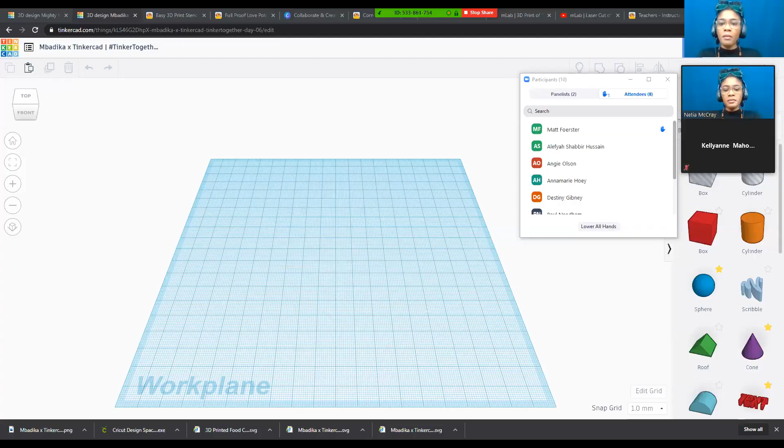So I want to see one more time a show of hands—who has logged into their Tinkercad account so we can get started? If you still need to get cardboard, we'll have another opportunity to grab additional materials for this session. But as I remember from last week and some of your comments in the Q&A, I want to make sure we get started on time. So for the first part, you don't need your cardboard exactly—we can just jump into the actual Tinkercad model.

So raise your hand if you're ready to start, meaning you're already logged into your Tinkercad account. If you don't have a Tinkercad account, go ahead and go to tinkercad.com to create one. I'm going to put it in the chat box so you can copy and paste the link.

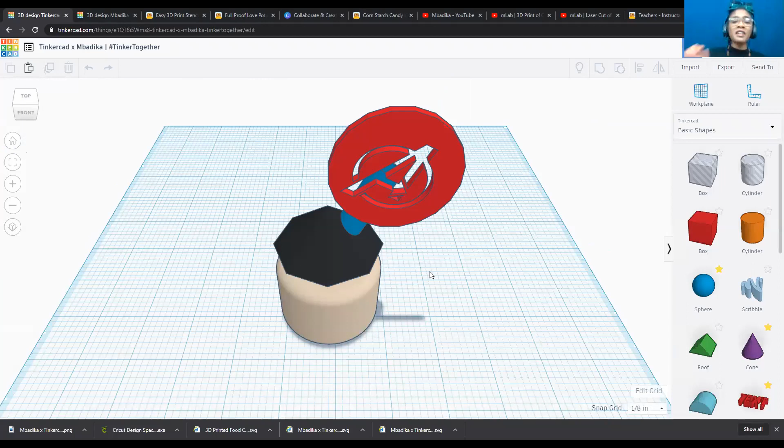Another project someone remembered that we did was a hot chocolate project. But it wasn't just a hot chocolate project — we did something very special with the hot chocolate.

Now, I confess, I've been binging a lot of YouTube videos, and one that's been inspiring me and providing comfort is known as Korean home cafe videos. The whole purpose is for you to create cute beverages, milkshakes, smoothies, coffees, and lattes like you'd see at Starbucks or Teavana or any boutique coffee shop, making it at home with cute cups and cute ice with whole strawberries in it. It's something I find very soothing when I'm stressed out, which has not been a weird coincidence over the past couple of weeks.

So one of the things I wanted us to do was create a stencil inspired by those videos in order to transform our everyday beverages into something really cool. One of the things we actually did was create a stencil in Tinkercad.

With that stencil in Tinkercad, as I'm going to show you right now, we actually 3D printed as well as made a cardboard version of the stencil in order to transform a hot cocoa beverage into something with a little bit more of a personal touch.

So as you can see here, I have my organization's name, spelled Mbadika. I put little stars here, and I put an egg because it was close to Easter, and I felt spring was for a new beginning, so that's why I picked an egg.

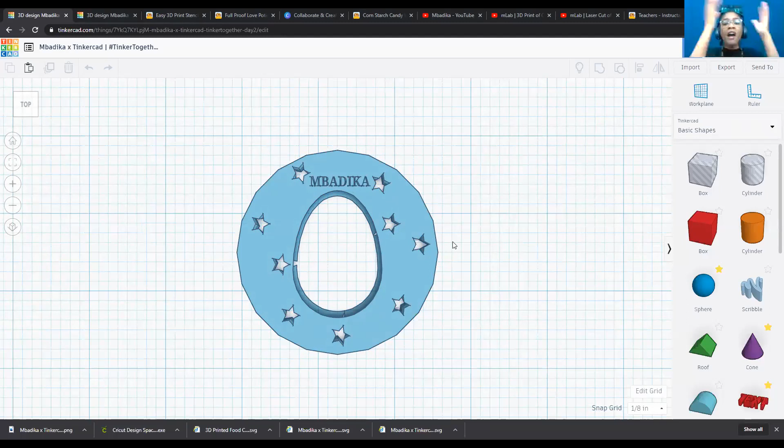I know other people picked other objects to make their stencil. The next day, we used this stencil and brought it to life, using it to create some cafe art. For better or worse, mine could have turned out better live, but that's what happens when you do stuff live.

Finally, there was one other project we did. What was the other project? So we have stencil, we have a cupcake topper. I think we did some other stuff. Didn't we do stuff with circuits? Didn't we do Circuits 101?

Yes, someone remembers. So we did Circuits 101, which was basically our way of showing how to light up a simple LED. Another project we did, which I hope everyone's been working on, was our Simple or Perfect Oasis project.

That project was based around how you create a blueprint or a plan to build your perfect getaway or private space in your home. A lot of us have been stuck at home, having to compete with a sibling or a parent also working at home, trying to create our private space as we've been dealing with the ramifications of what's going on today.

So a lot of us have been trying to figure out what is my sacred space, what is my perfect oasis. We used Tinkercad to plan out how we will build this perfect oasis, given common items we have in our home, including a sofa, a bed, a blanket, and tried to figure out how to create a blueprint using Tinkercad to do so.

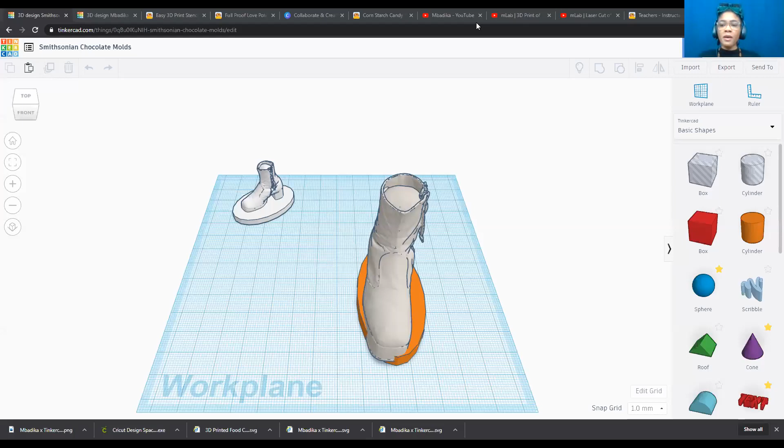So we also decided to explore a couple of the collections in Tinkercad. I'm going to show you right here. We explored a couple of collections in Tinkercad to create a mashup of more than one object. As you can see here, this is my original mashup.

We went into our right-hand toolbar in Tinkercad, and we mashed up items from the Smithsonian collection, available here. As we scroll down, we can see there's a woolly mammoth, a boot from space, a command module, a triceratops skull, and an orchid. There's many things we mashed up alongside other collections or 3D design models in our Tinkercad toolbar to create something unique.

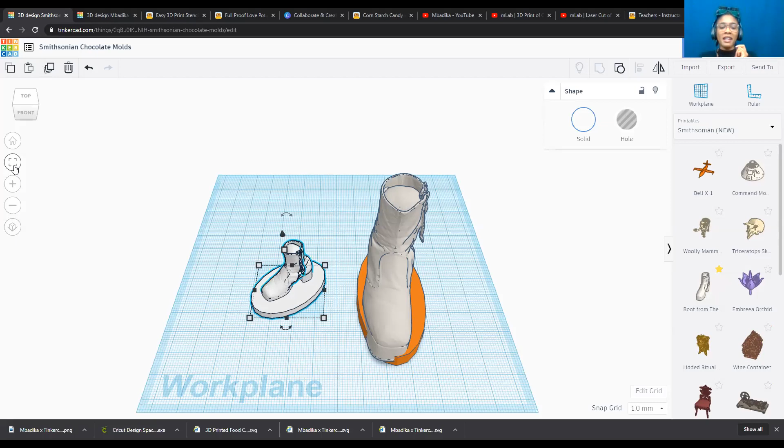Some of you did hearts with orchids coming out. Some of you did a woolly mammoth with a customizable scarf on an actual airplane taking off. I kept it pretty basic. As you can see here, I just used the boot model. I'm going to zoom in with my left toolbar. I did the boot model and just had it on a platform to make it look more like a work of art. That was just something I did.

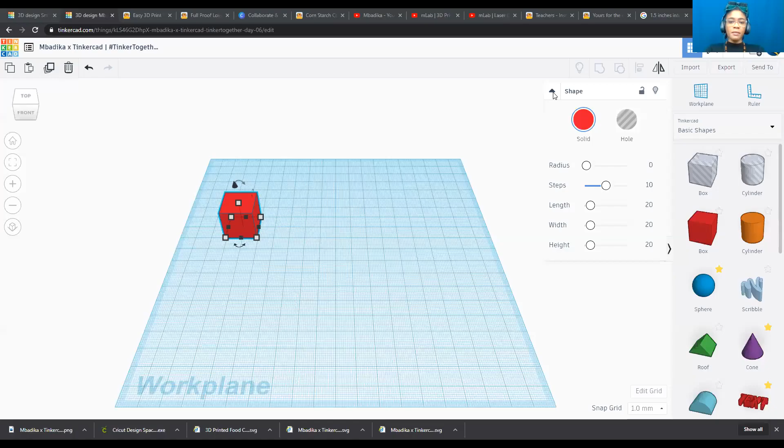So let me go ahead and do a quick screen share for those of you who want me to convert into millimeters. I'm going to minimize this shape for a second and add a bit of text. So for those asking for it, 1.5 inches is 31.8 millimeters, and 12 inches equals... no, that is not what I wanted to do. Okay, welcome to when you're trying to do too much.

It's 304.8 millimeters, so let's go back to here. 304... I have to remember because I can have my piece of paper here. 304.8 millimeters for those who are using millimeters. Raise your hand when you're done so I know when we can move on back to our actual box or rectangle here.

Now, the reason I'm asking you to write down those measurements is you're going to find there will be a lot of measurements that come into play the more complicated or advanced your CAD models get. It's always a good idea to get into the habit of writing down your measurements instead of trying to memorize them, because eventually you'll be like, okay, 304.8, 304.8, 304.8... ah, dang it, what was it? And you forget, and then your CAD model is off.

If you're doing something like 3D printing that needs to be exact, writing down your measurements is going to be the difference between your model working and not working. We don't want to see models fail because we were afraid to write down a little note, so don't be that person, write it down.

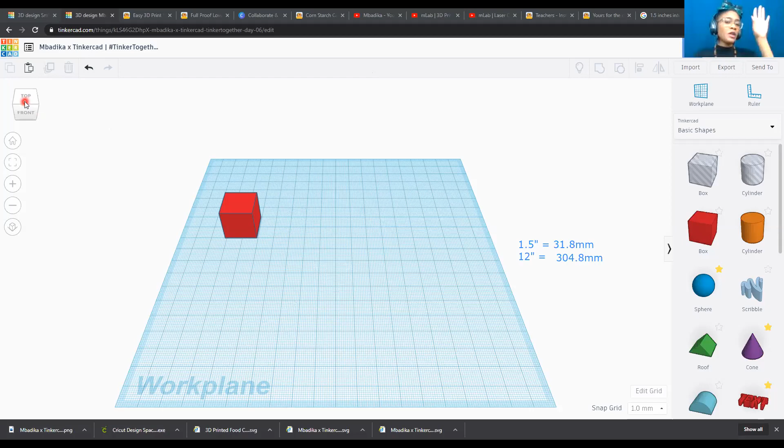So the way we do a top view—excuse me one moment, there we go. I'm going to add a spotlight to my mouse. In order to do the top view, go to the left-hand side and click that camera cube. That's going to allow us to change our perspective.

As we change our perspective, we're going to click that box and zoom in with fitted view. To do fitted view, go back to the left-hand side and click the one that looks like a camera. Click that and it will zoom in on our figure.

Now, we know that our width needs to be 1.5 inches or 31.8 millimeters, and our length needs to be 12 inches or 304.8 millimeters.

If you don't know which units you're in, inches or millimeters, go to the bottom right-hand side and you'll see Snap Grid. There you'll see the dimension, the width and height, since it's a cube, of the white squares on your Tinkercad work plane.

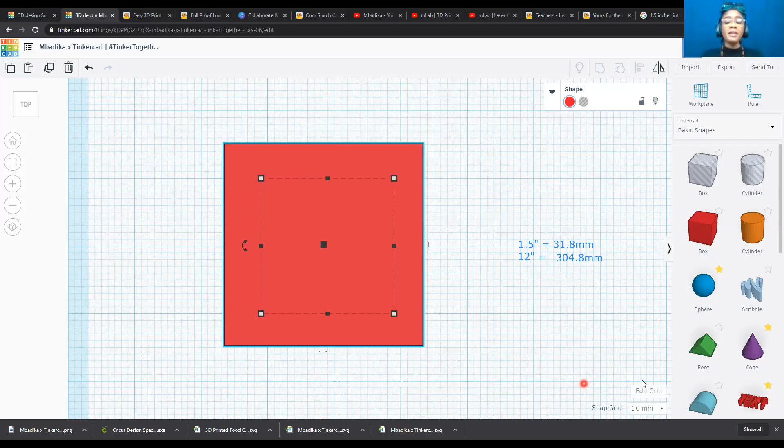If it says 1 millimeter, then the default measurement in Tinkercad is millimeters. If you want to work in inches, go to Edit Grid, click Units, and switch from millimeters to inches. That allows you to transform into that unit.

In terms of width and length, you want to make it comfortable for you to guesstimate the actual dimensions of your project to double check it's right. Since each of these planks I had earlier is 12 inches in length, I know my actual work plane needs to be larger than 12 inches.

So what I'm going to do is make it 24 inches by 24 inches. This will give me enough space to work on my garden model without running into any interference.

So if we zoom out quickly, you can now see that my square is just a small square in a huge work plane. I'm going to go back to the left-hand side to fitted view to zoom right back into the box I brought over earlier.

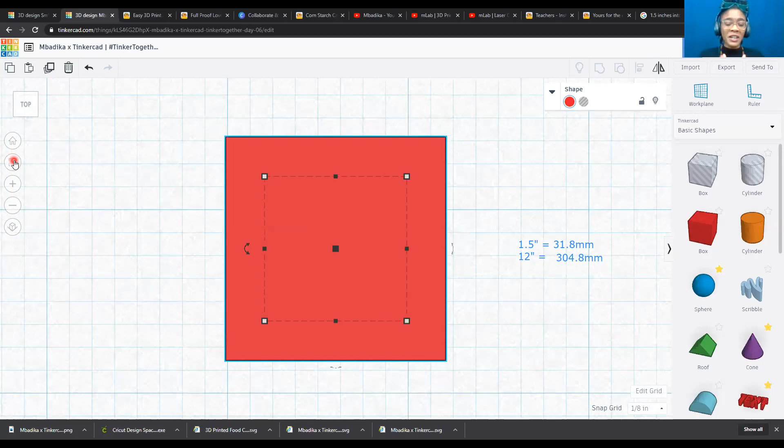Sometimes this will get a little complicated, so if you have any questions or concerns, feel free to send me a Q&A to let me know to repeat a step or if something went kind of weird.

Raise your hand if you're ready to convert your box model to the dimensions of the little wood plank I have in front of me. Go ahead and raise your hand on the participant side so I know we're all in this together and at the same step.

As I said before, we're tinkering together, so we try not to leave any man, woman, child, baby, flower, rabbit, etc. behind. Yes, I still had my cup of coffee this morning, so we're going to have a very fun time in a bit, if you haven't already.

Okay, I see everyone has their hands raised pretty much, so if you need any help, go ahead and send me a Q&A, but I'm going to continue going. So here, we're going to go back to our actual shape.

We're going to click on these little white squares. When we click on these white squares, we'll notice our width and our length. If I click on it one more time and move my mouse to the top number, I'll notice that the width of my actual box is 0.787 inches because I converted to inches.

That's not going to do. So I actually am going to transform this into the 1.5 inches that I had earlier. Click 1.5 inches, you should see it actually change.

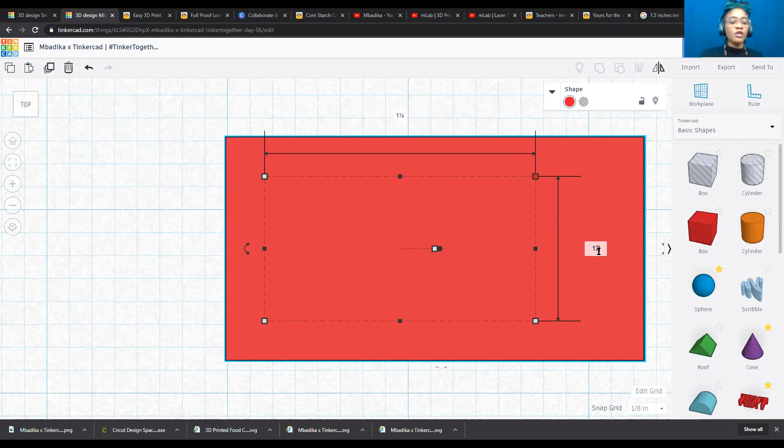Now I need to change the length of this replica of a wooden plank, and our length was 12 inches. So what I'm going to do is click here, and click to make it 12 inches. If I zoom out, I'm actually going to see the full length of my project, or I can go to my trusty left-hand button to get a fitted screen view and see.

Now, because it's 12 inches, you see it kind of tipping over the work plane. All that's necessary to remedy that is to take our model and drag it back down, just to make sure she knows her place. Going back to our left-hand side for fitted view, we can now see it firmly on our work plane. And that's how we make our 12 by 1.5 inch plank.

So you may be asking, well, Miss Nisha, it's great that we made a plank, but this is 3D design. What we just did here was a 2D design, which is basically just taking a top view and looking at the length and width of the plank. But there's a hidden dimension here, otherwise it wouldn't be 3D design. All we did was 2 dimensions, length and width. But what about the third dimension, which is the actual height and depth that makes a 3D design different from a piece of paper?

So what I'm actually going to do in order to take account the thickness, I'm going to have to use my ruler. Now, the trick is if you have something that's less than about 1 inch, you really need to take account all the space on your ruler.

So for those who weren't here, if you look at my ruler, where the 0 inch mark starts and where the ruler starts, there's a good distance between where it starts here and where that mark is. So you never want to measure from this end, because you're going to take into account an additional 1/4 of an inch. If what we're going for in our models is for them to be precise, we can't start at the very beginning of the ruler. We have to start at one of these marks on the ruler.

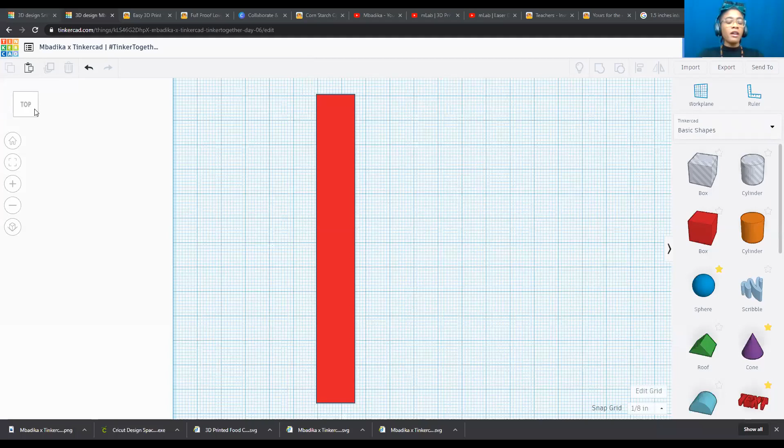So here, I'm going to go back into Tinkercad, and instead of doing a top view from my actual left-hand cube here, I'm going to go to the home view, which is going to allow me to see, if I zoom out a bit, not only length and width, but height as well.

And I'm going to transform that height, which is the center white cube here. We see the height is 0.787 inches. I'm going to translate that into 0.25 inches to take into account the height.

And you see here, the actual thickness of that wood plank looks quite similar to the one I showed you earlier. Now, for those who need a conversion...

0.25 inches is 6.35 millimeters. So if we go back, let me double check... oh, 6.35 millimeters. See, even my memory is off. Let me erase that. It is 0.25 inches equals 6.35 millimeters. I just left off a whole 6 millimeters. So there we have it.

So if I look into the shape here at this angle, I'm going to zoom in. The thickness in regards to, or in comparison to the length and the width, looks about right. So go ahead and do that, and raise your hand once you have an actual CAD model of the plank like I showed you earlier.

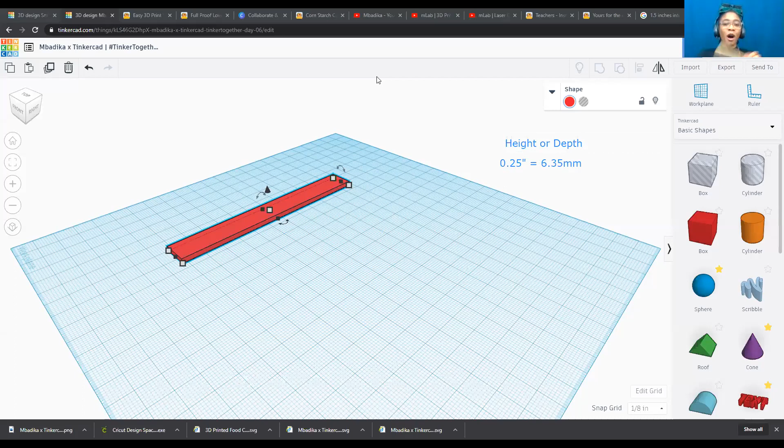Do you guys feel like you're being real engineers today? We're actually taking a real object in real life and measuring it and replicating that object in Tinkercad.

And to make this even come a little closer to home, I'm going to actually change the color. Here you can see we have some presets. I'm going to do one that's closer to wood to make this look a little more realistic for what we're doing today. So go ahead, don't forget, you have a 1.5 inch width, 12 inches is the length, and it's 1/4 of an inch height.

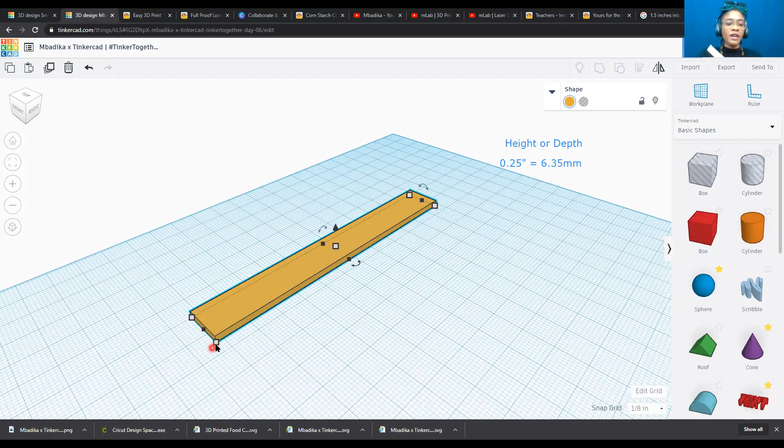Let me get her down. So you see here, it's 1.5 inches. If you click, sometimes when you're trying to get the measurements, feel free to click that little white square in order to hold the measurements for a second so you have enough time to go over it. So you see 1.5 inches here and 12 inches there. I'm going to click the white square here, and it's 1/4 of an inch here.

So raise your hand if you were able to get this CAD model. If you weren't able to, go ahead and ask me a question in the Q&A part to let me know if we should move on or if we're at a good spot. As I told you before, raising your hand lets me know if we're in a good spot to keep going.

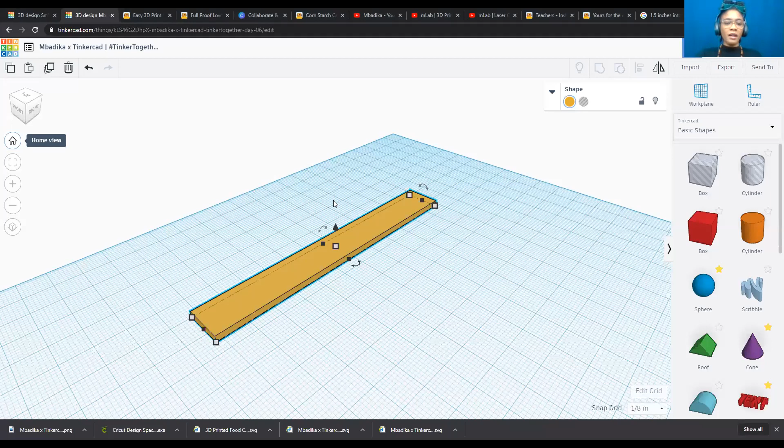I'm zooming out a little bit because I have such a huge work plane, 24 inches by 24 inches, which is pretty much 2 foot by 2 foot. If you don't know what 2 feet looks like, look at your leg, most likely your leg is about 2 feet long. Just to give you context, this right here, from here to here, is 1 foot. So your work plane is going to look out of sorts because 2 feet starting from here goes like this.

So don't worry if you have to zoom out a lot. I saw someone ask if their dimensions are off—your dimensions aren't off. We're doing 2 foot by 2 foot because we have a pretty big garden bed that we're designing. So here we have our first wooden plank.

What we're going to do is click on the left-hand side. Let me add a little spotlight so it gets all the shine that it needs. Go to the left-hand side and click the duplicate tool and repeat. If you're using your keyboard, go ahead and click Control-D to do the same step.

We're going to use our keyboard, using the left arrow key to gently move my plank across. If you want to make bigger movements with your arrow key, I'll go back a couple spaces. Here's another trick you can use in Tinkercad.

Follow my little spotlight. If you go down to the lower right-hand side, where you can use a reference point for whether you're in inches or millimeters, you can find something that says Snap Grid. Snap Grid dictates the actual dimensions of each little square you see in your work plane—each square represents a measurement. Right now that measurement is 1/8 of an inch.

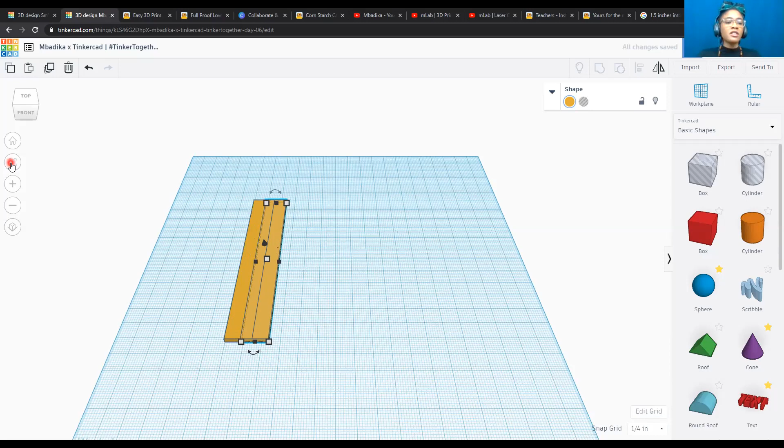To show you a little bit closer, I'm going to use the fitted view on the left-hand side. I'm going to do the same thing with my mouse, go right, left, right, left. And you can already tell it's a huge jump from before.

If I want to make my jumps a little smaller, I can go back down to Snap Grid, and let's say I want to make it 1/16 of an inch. If I want slower movements, you can see this is not as large a jump left or right as it was at 1/4 of an inch.

So sometimes when you make more precise models, go ahead to your Snap Grid and make your actual squares smaller, in order to make it more precise. So go ahead and do that.

If you're having trouble duplicating the wood, click your wooden plank, go to the left-hand side, click duplicate and repeat, and you'll notice it made another plank the same distance away. What I love about that duplicate and repeat tool is it actually memorizes your movements in order to do the same thing over and over again.

Now I'm going to do this all over again, so no frets. I'm actually going to start back with the one block. Some of you are asking how you actually change your work plane dimensions. Don't worry, I'm going to start from scratch quickly just to show you how we did it.

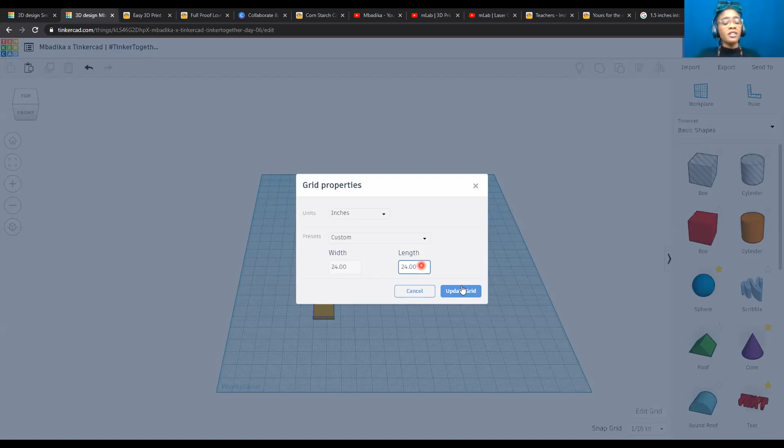That allowed me to have a bigger grid for my 12-inch by 1.5-inch plank with a 1/4 inch height. Next, I clicked my actual wooden plank, clicked the fitted view on the left-hand side, went to the top left toolbar, and clicked the duplicate and repeat tool. If you don't want to use the upper toolbar in Tinkercad, feel free to use the keyboard command Control-D. When you do duplicate and repeat, Tinkercad starts paying attention to your movements with the clone plank.

So what I'm going to do is move it over, and right now I'm moving it 1/16 of an inch. Every time I move it with my keyboard arrow keys, I'm only moving it 1/16 of an inch. If you want your movements more dramatic, go down to Snap Grid on the bottom right-hand side.

Click down, and to make it larger, go to 1/8 of an inch. You'll notice my movements are more dramatic than before, meaning when I click my right arrow key, instead of going 1/16 of an inch, which is like a little hop, I go a bigger hop.

The reason why you will want to use your arrow key instead of your mouse is because when you're making a precise replica like we're doing, you want it to line up perfectly. With a mouse, unless you have excellent motor coordination, you'll find you move your shape a little too much or too little and mess up your design. So I prefer to use my arrow key so I know I'm moving exactly 1/16 of an inch or 1/8 of an inch, etc.

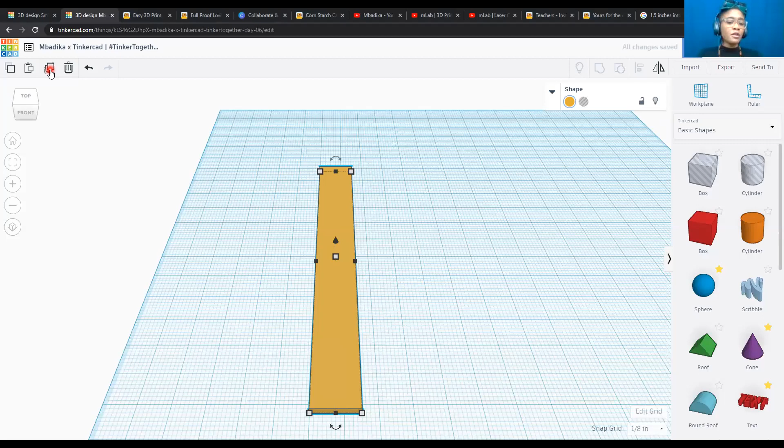If Control-D doesn't work on your keyboard because you're using a Mac, etc., you can click the upper left-hand side to the duplicate and repeat tool. I'm going to use my keyboard to move it a certain number of steps like I did before. Now I want to have these two pieces line up, just like I showed you with the wooden planks. So you saw how I did that there, that they're lining up.

The reason I want it to look like that is I want my wooden plank bottom to match up to this plank like such. So to do this, I want to make it line up a little bit better in Tinkercad. I want to make sure there's no gaps like you see here, I want this to line up perfectly, which is why I'm being so careful with my keyboard. Every time I'm moving it just a little bit to make sure these two pieces are lined up in order to make one side of my garden bed.

Typically, I'm going to do a garden bed with 3 planks stacked on top of each other. This I'm only showing 2 because my hands can't hold 3, but that's beside the point. Let's go back into Tinkercad so I can actually show you what I'm talking about.

So here I have this lined up the way I want to. Once I have it lined up, I'm going to put the spotlight back on my mouse so you can see. Once these 2 planks are lined up, I'm going to go back to the left-hand side and click the duplicate and repeat tool again. Once I do that, you'll notice a 3rd plank appears. The reason the 3rd plank appears is what I said before: Tinkercad was watching your move when you duplicated this middle plank right here, and every time we moved it to get it to a certain spot, Tinkercad was like, oh, that's what she's doing, well, we can do that and save her the trouble.

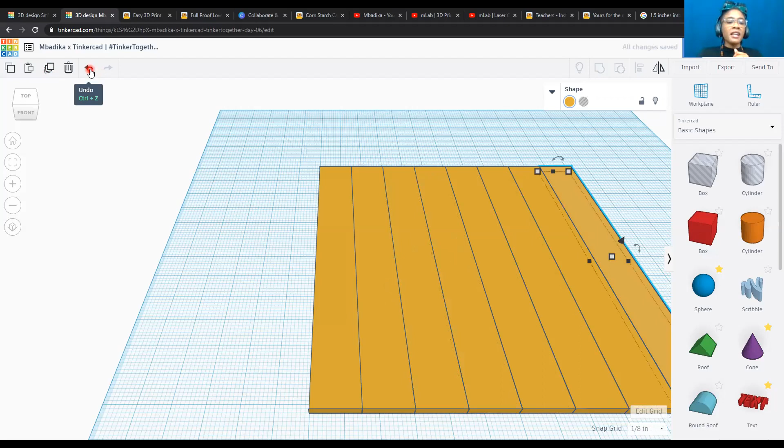So let's say I wanted to make this side of my garden bed 5 wooden planks high. All I have to do is keep clicking the duplicate and repeat tool, and it repeats the same movements I did before. If you want to undo, just click Control-Z to undo back to 3 planks. 3 planks is what I feel comfortable with, so that's what I'm actually going to do.

Let me see by a show of hands who's still following me and who's gotten to this point. Don't be shy, I want to make sure we're all in this together and on the same part.

No worries, I apologize for the glitchiness. As I said, the weather is not terribly great here. So I just wanted to make sure that everyone's with us.

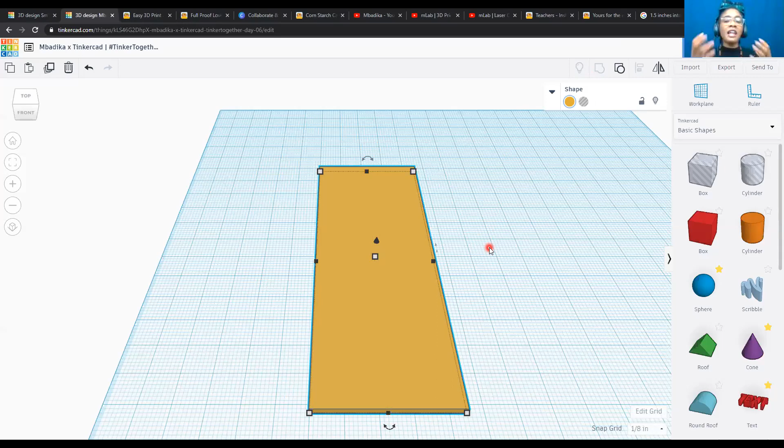Now, if you want to keep those sharp lines like you would have for a typical wooden plank with 3 planks against it, let's go back to Ungroup. I'm going to show you a different way of doing this. So I'm going to click off.

If Tinkercad lets me do that. As I mentioned, sometimes Tinkercad is your friend, sometimes it's not. You got to let it have its moment. It seems like it's almost finished, being a little glitchy here. As I said before, it's storming on my side, so I'm going to go ahead and reload my 3D design model. If you find that Tinkercad is being glitchy, go ahead and reload.

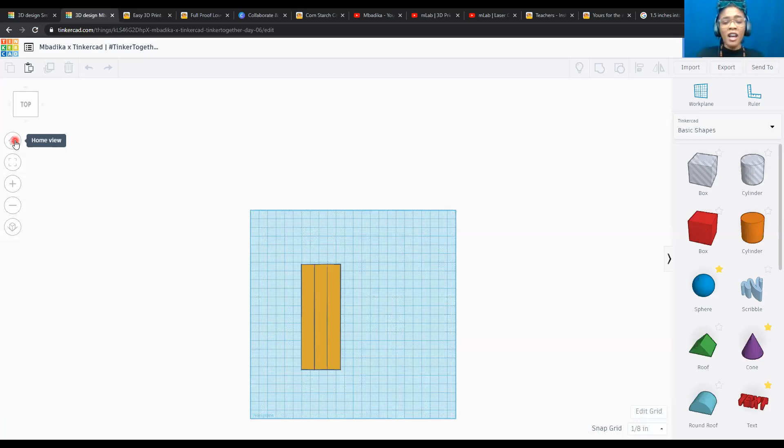One of the nice things about Tinkercad being a browser-based software is that it actually saves constantly your CAD designs. So if you ever find yourself in a weird position that you're like, yeah, this ain't working for me, go ahead and feel free to use that refresh button. Sometimes you'll lose a part of your project that you did in the last minute or two, but that's better than sitting there for 10 to 15 minutes waiting for it to come back.

As you saw with the quick refresh, I can actually individually select the wooden planks. I'm going to do something a little extra while I'm waiting for a couple more folks to raise their hands. I'm going to change some of the wood plank colors to give it a little bit more dimension. I'm going to add maybe a darker wood to do that.

Instead of using the shift key on my actual keyboard to select all the shapes, I'm going to click my mouse up here since there's no other shapes on my work plane, and drag it across. So when I drag it across, it should select all 3 shapes. To double check it selects all 3 shapes, you can actually zoom in and you'll see a very faint, almost light blue outline. That means that object is currently selected.

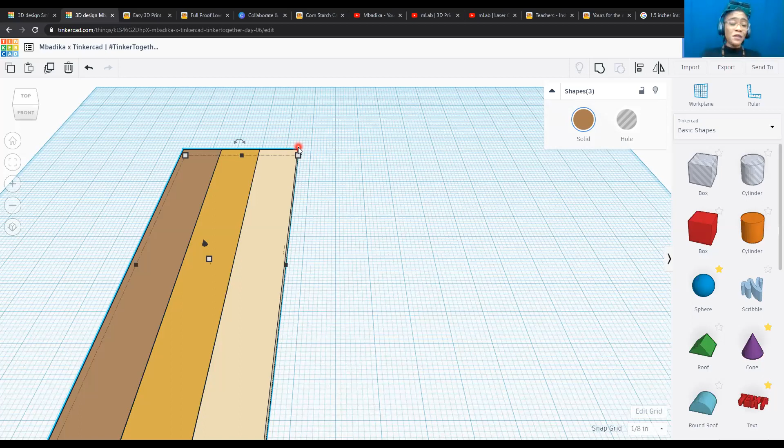On top of that, if you want to triple check that you selected that shape, go ahead to your right-hand side and you'll see shapes 3. That tells you how many shapes you selected and grouped together before you can actually hit that group button to merge it into one beautiful piece.

But wait, we made a mistake there, because we've seen our 3 planks got merged into one color. But don't fret. If we go down to our actual shape toolbar, we can go to the multicolor and select multicolor to keep that 3-color trio going, in order to make a beautiful side panel of our garden.

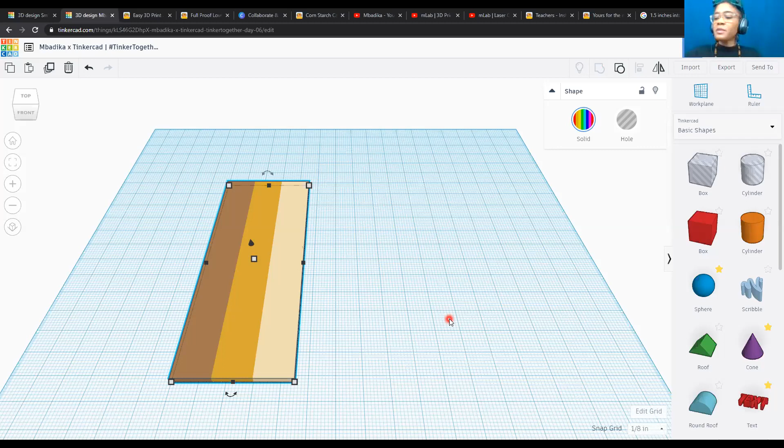Once we hit that, we now need to figure out how to transform our 2, well, 3 panels that we found merged from this, which is done lying on the work plane, to this, actually looking like the side of a garden.

So what we're actually going to do is rotate our actual garden side to make it look more like an actual side, not like a flat bed. I'm going to show you how to do that by using the rotate tool.

So let's go back into Tinkercad. Pressed the wrong button, but it's okay. If you look at your actual group shape, I'm going to go ahead and put a spotlight on it so you can see where I'm at on my work plane.

If you look right here, you'll see there's a double arrow. If you zoom in on that double arrow and click, you can actually rotate your figure 90 degrees. So once you start rotating, click that number box and type in 90 degrees.

That's going to make our actual wooden planks turn so they're sitting upright. Instead of going horizontal or in line with the work plane, we're going to have it sitting straight up and going through the work plane.

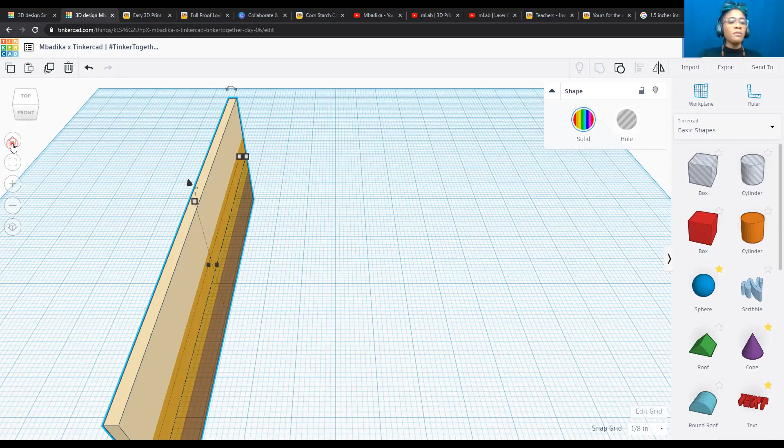Another thing we noticed once we rotated it, if we go to a home view and zoom out, is that half of our actual wooden plank side is going through the work plane. If we change our camera angle on the left-hand side, we'll notice almost half of our actual garden bed side is through the work plane, which is this part right here.

So what we're going to do is zoom out and raise this so it's not sitting into the work plane. When we click our black triangle here, we can raise our object in and out of the work plane. If you notice when I'm moving it up and down, the only number that's changing is this number over here on the right-hand side.

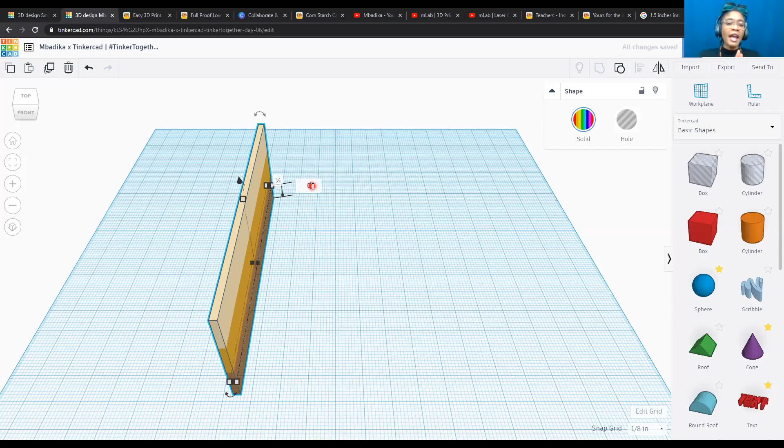In order to save ourselves being extra particular, I know 0 is the work plane. So if I enter the number 0, I know my object is going to be sitting exactly on the work plane. So instead of being cut in half, if we look at a front view, it's sitting exactly on the work plane here. Let's change our camera angle back on the left-hand side to home view, and we can see that it's no longer going through the work plane.

So seems like we did a pretty good job, right?

Now, when we do a garden bed, we said the basic garden bed shape that we were going to do today was going to be a rectangle, correct? So in order to do a rectangle or even a square, how many sides does a rectangle or square have? Let me know in the Q&A part. This is a softball warm-up question, shouldn't be that difficult. How many sides does a square or a rectangle have?

Go ahead and answer in the Q&A part. Okay, I see some people. Okay, I see you. So if you actually have a cube, then you actually have 6 sides, right? If you have a square or a rectangle, then you have 4 sides. So when we're actually making our square or rectangle, we're just going to stick to 4 sides.

Now that other number of sides is going to come into play because our garden is going to need an actual bottom to actually put the plants in. So for right now, let's actually make the short ways size—2 sides long ways, 2 sides short ways.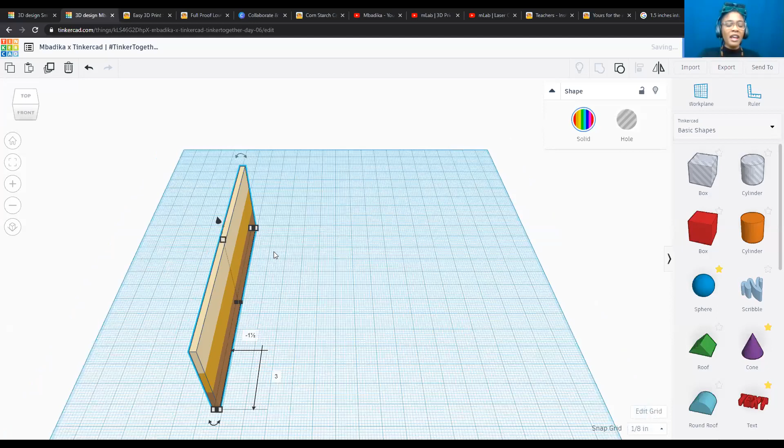So you're going to see how to do that easy without having to go through the whole process we just went through. As you can see here, we have our little board. If we remember correctly, the length of this is 12 inches. So let's go ahead and add that as our note.

If you're doing millimeters, I trust you remember. So the length is 12 inches, right? And that's the length of a plank, wooden plank. The width is 1.5 inches, and the height, or the thickness, is 0.25 inches.

Now, when we make our garden bed, if we want our garden bed shape to be pretty much a square, for example, we know for a square the length and the width have to be equal. If we know the length of our first side from here to here is 12 inches, that means the length and the width of our actual garden needs to be 12 inches by 12 inches. So let's go ahead and add that to our side.

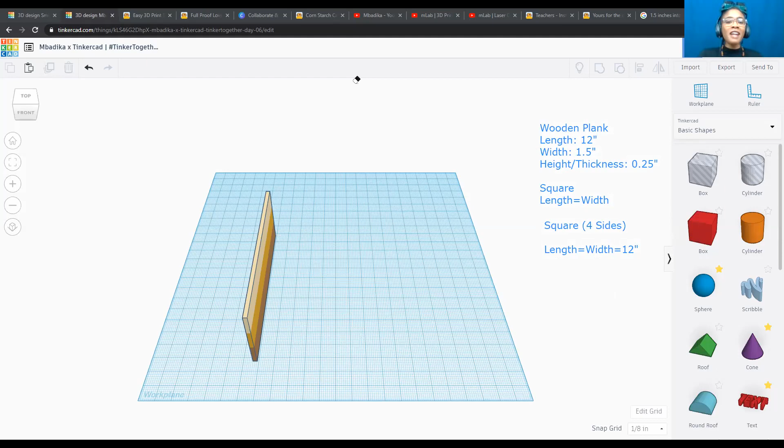So that means our square, which has 4 sides, needs to have the length and width be equal, which means the length equals the width—oops, wrong symbol—equals 12 inches. The way we can make sure that we're following that correctly is we can go back to our right-hand toolbar, click on... I keep doing this no matter how much I do these Zoom webinars, I always make that mistake. I'm so sorry, guys.

But I'm going to go to my right-hand toolbar and drag over a box shape. When I drag over the box shape, I'm going to zoom into my fitted view that you can see on the left-hand side.

I'm going to minimize my shape so you can actually see our toolbar and our notes here. I now know that for my base, it needs to be 12 inches. Using the tab key, 12 inches. Okay, I did it right. So we know that this needs to look like 12 inches by 12 inches, like our red base here.

In order to make this look like dirt, I'm going to change it to black to replicate soil. So we now know that the size of our garden bed has to cover each side of our square here. Now let me show you a trick.

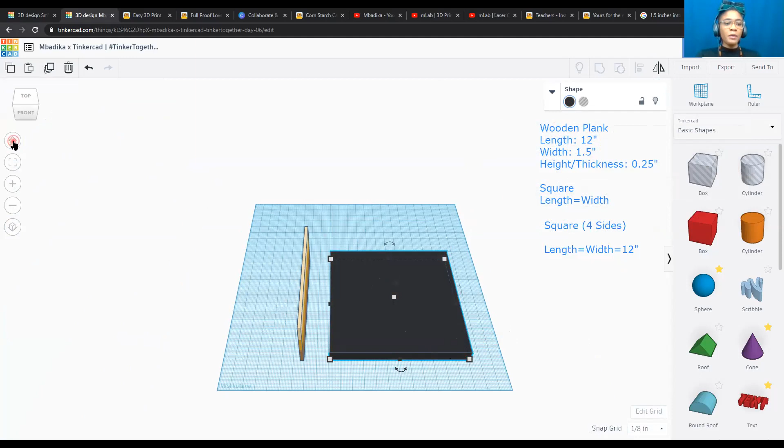If we click our home view, is it zooming in too much? I'm going to zoom out a little bit and move this so it fits right in line here.

Now remember what my favorite tool is? My favorite tool is the Align tool, and we're going to be able to use that right now.

So go ahead and select your garden bed, which is this box being replicated by the black color, because this is looking like the soil that's going to be in your garden bed. Let's click this and click one of the sides here, and we're going to try to align this side of our square garden bed with the base of our garden bed using the Align tool.

The Align tool is a special tool to make sure everything is straight. We can find it on the upper right-hand side of our toolbar. We're going to select it, and you'll see all these dots come up. If you're new here, one of the cool things about Tinkercad is we can click one of these dots.

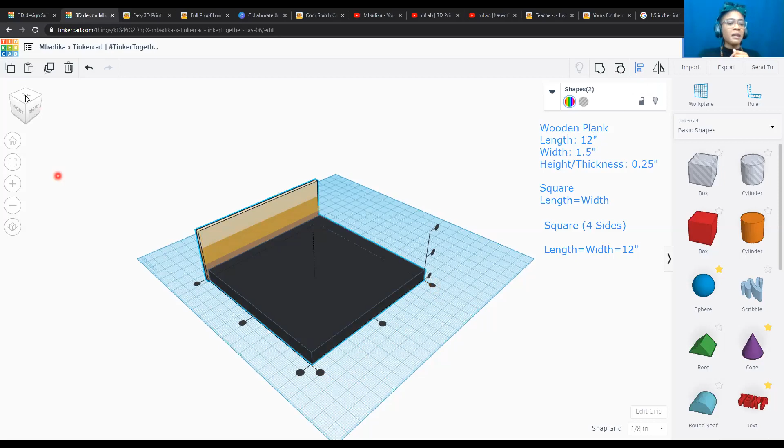We can see a faint outline of one of these models here, so I can kind of see the future and see if it jives with me. I'm a stickler, so I'm going to go to my left-hand camera angle and do a top view to make sure that this looks aligned. If something looks aligned and okay, go ahead and click that dot and it aligns that way.

I don't need to align it here because I already know that's not going to count here. But what I do want to see, which seems it's already solved for me, is making sure when I look at the front view via my left angle, you see a light gray like that, it means it's already aligned, you don't have to worry about it. This is only a concern because, as you saw earlier with that wooden plank going through the work plane, we don't want that to happen.

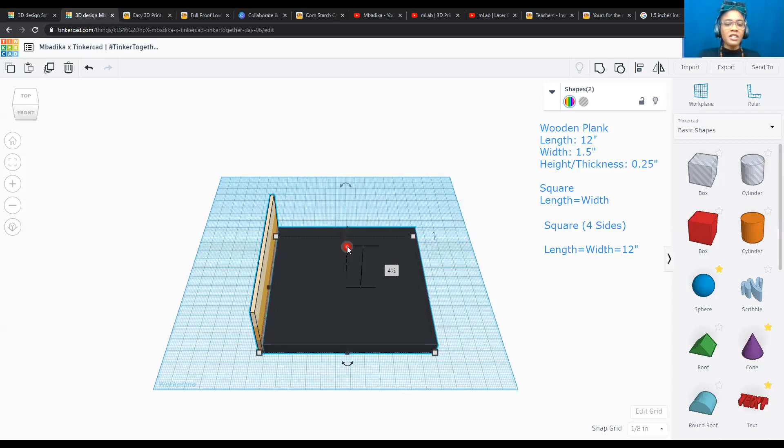Now you may be asking, okay Miss Nisha, we now have one side done. I'm just going to change the depth of this because no, that's not what I wanted.

You may be saying, okay, we have one side of our garden bed, but we have 1, 2, 3 sides left that need to happen. How are we going to do this? The way I'm going to do it is I'm actually going to replicate or duplicate and repeat this whole plank to be here, here, and here. And the way I'm going to do that, I'll show in a moment.

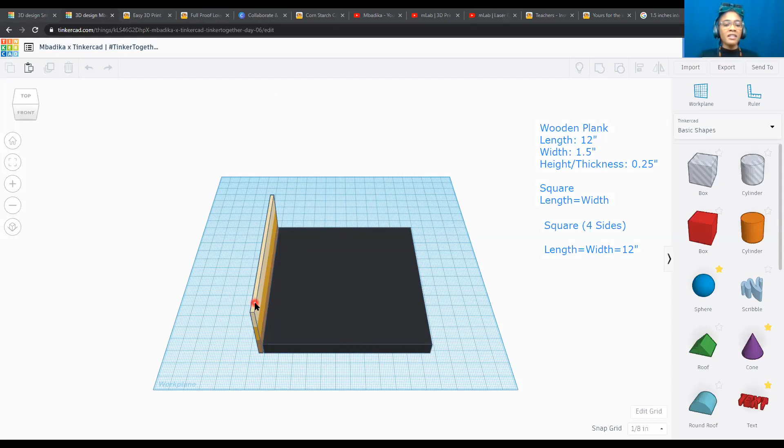Perfect. So now I'm going to focus on how to actually address these other sides right here. The first thing I'm going to address is doing this side and this side, or here to here, because it's a square and it doesn't matter. So the first thing I'm going to do is click the panel that I want to duplicate, go over to the duplicate and repeat tool, duplicate and repeat.

Now that I've duplicated it, I'm going to notice that it's in the exact same spot as the other one, but I need for it to not be, because previously we had the panels this way and we want to rotate it so it's this way for the other side. So we're going to have to use the rotate tool again, as well as the align tool. So let's get to it.

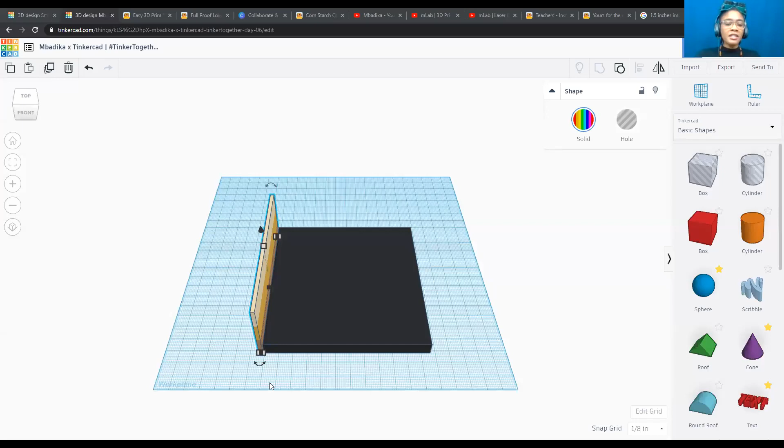So if we go back into Tinkercad, we're going to have to use the rotate tool first. Now that we have our duplicate version of that panel, you're going to see right here, if I shine a little spotlight on it, that there's a double arrow right here. This allows for us to rotate on the work plane as such. Click, and I'm going to rotate 90 degrees. So you can click and just type it in. Press enter, and we've rotated 90 degrees.

Next up, I'm going to have to move this shape over here. Now I can drag the shape, or if I want to be more precise, I'm going to use my keyboard keys in order to move it exactly there. If you want to get a zoomed in version, go ahead to your left-hand side and click fitted view, and you can actually see your wooden panel.

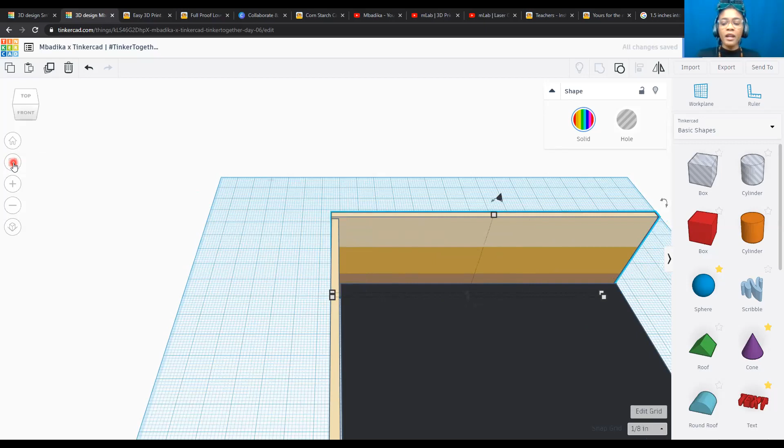I did too much. Right there. If we do a top view, we can see that there's a slight gap there, so we can move it just in. And let's click off and go back to our home view.

It zoomed us in. So to make sure that this plank is aligned with this, we're going to click here, go to our align tool, which is on our right-hand side, or using the L key, and we're gonna make sure we're aligned down the middle. Now, once we made sure we're aligned down the middle, let's check our top view, and it looks like we're doing pretty solid.

Okay, once we've done that though, let's see if we can click off again, and click back to this panel. And we're gonna try to do the same thing in order to address this. So we're gonna go ahead to the duplicate and repeat tool and click it one more time.

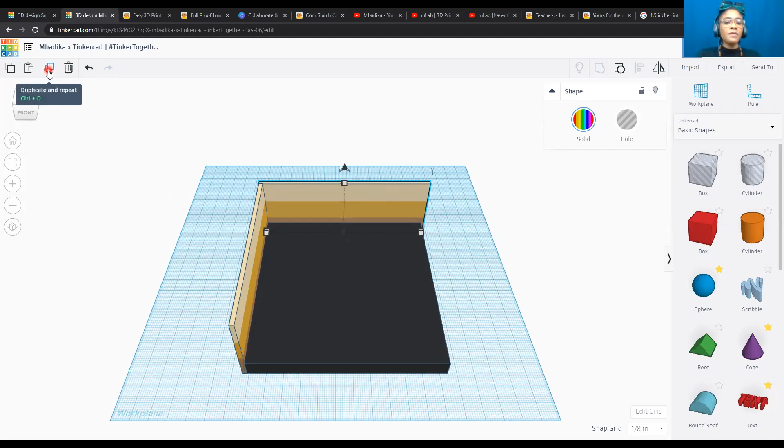Now you notice it didn't do like it did before with the wooden planks. And that's because we actually clicked off, which disabled us actually repeating the steps. So this time we're not gonna click off. If that sounds confusing, don't worry, just follow along and see how I'm doing it. And then we're gonna do this again together.

So first thing, I'm gonna click here and I'm gonna rotate 90 degrees, -90. Next up, I'm actually gonna go back to this view because it's a lot easier for me to move. Use my keys to move my plank. You can also use your mouse if you feel more comfortable.

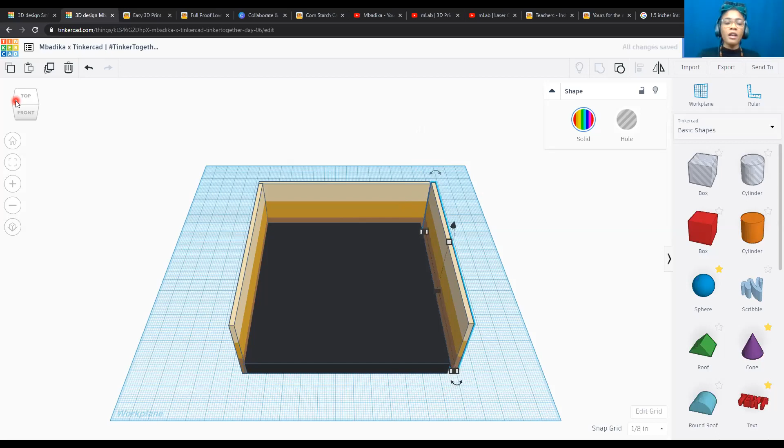I see a couple questions on that. And moving this down, checking my camera angle on my left-hand side. And boom, that looks pretty decent. Let me check my camera angle again.

Looks pretty solid. And now I'm just gonna go ahead, instead of clicking off, I'm gonna go back to my left-hand toolbar and do duplicate and repeat. And you see here that you already have your side automatically done. That's because when you click off, it goes, oh, you don't need us to keep following you or memorizing your steps. Okay, that's fine.

Unfortunately, the only thing we need to do is some slight tweaking because we're slightly off here. So what I'm going to do is move it down, move it slightly, and boom, have it there.

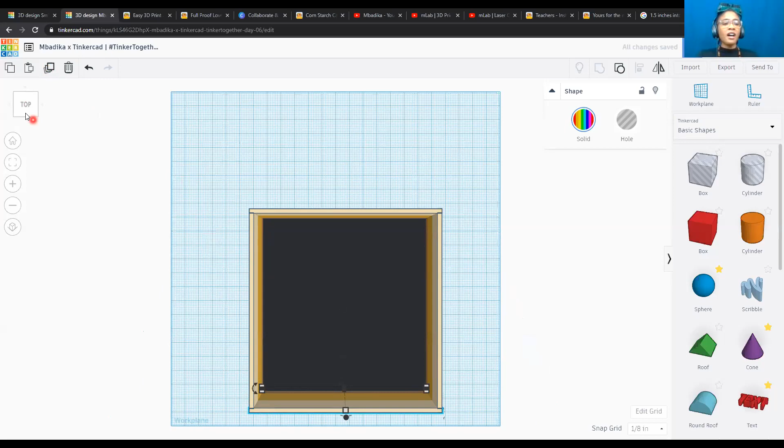Now there's other ways you can do this. You can drag and drop and rotate as needed. I like doing it this way because it allows me to minimize how much work, because you didn't have to rotate this and get it exactly lined up against your actual black box here. You can actually just press the duplicate and repeat tool and do some slight tweaking to make it work here.

I'm a stickler for things being aligned, so I'm gonna select this side, and this side—I said side, but I meant the base. Go over to the right-hand side, click the align tool. If you see it's light gray, it's already aligned.

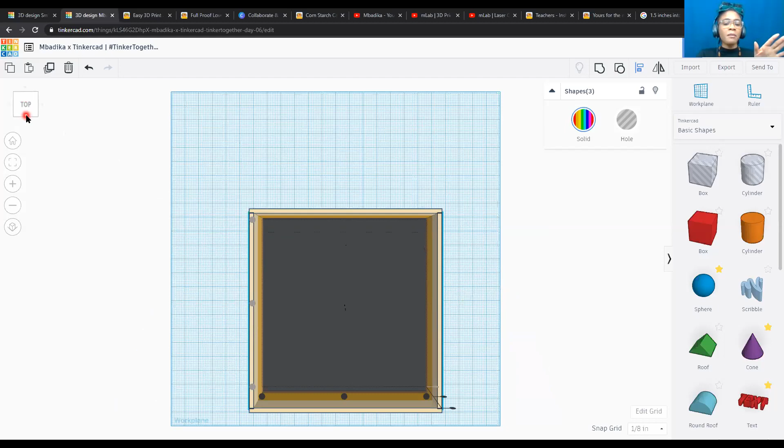Check my camera angle on the left-hand side. This is already light gray, which is letting me know everything's aligned on the work plane. I'm gonna double check next, this side to the base of my garden and this side. I'm gonna go back to the align tool, noticing that is gray. If I change my left-hand camera angle so it's aligned this way, and if I change my camera angle again towards the front, I see that it's aligned this way. So everything's hunky-dory.

So if I do a home view, zoomed in again—no! This is what our garden looks like. And I'm just gonna slowly rotate it. It looks like a pretty decent box.

So this is just showing us how we can actually assemble our box here. So I'm gonna go back to the top view. If you see right here, there's a little bit of overlap. Don't worry about it—we're gonna learn some more skills on how to address that tomorrow.

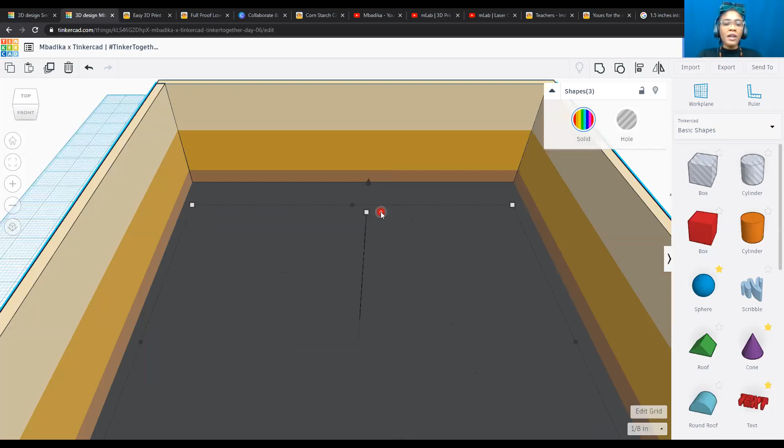Now, if you don't want to use your keyboard strokes to do this and you want to do it by hand—using your mouse and rotating and moving it exactly along with the align tool—that's totally fine. There's 15 different ways to create this. I'm just showing you one particular way that I do it using the actual duplicate and repeat tool.

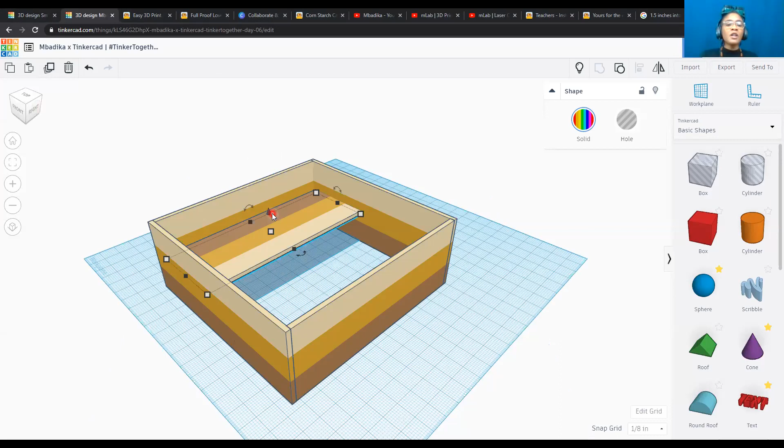So what we're going to do is click this actual black triangle. We're going to click her and bring her down. The only number that's really moving is this number right here - the distance from the work plane to the actual object. We want that number to be 0 because we want this plank to actually be on the bottom of our work plane.

Now that we've done that, we have to actually sit back and look at some math for a second. I'm going to adjust her so she's right there. So, using our actual text tool, I'm going to do our math part right here.

So we know that each side is 3 wooden planks. Each wooden plank has a width equals 1.5 inches. So we need to take into account the actual width of that plank, which is 3 times 1.5 inches - the actual distance from here to here of our bottom plank.

The reason why this is important for us to know is that we need to figure out how many of these we need to fill up this empty space, or the blue space here. So what I want everyone to do is get a calculator or use their actual browser, because if you're in Google Chrome or Microsoft Edge, you can actually type in 3 times 1.5 inches and press the enter key in order to get an answer.

The reason why this is important is we need to know how many of these in order to fill up this space. Once you get an answer, I want you to tell me in the Q&A part, what is 3 times 1.5 inches? Don't overthink it, just go ahead and send me a number. So, 3 times 1.5 inches.

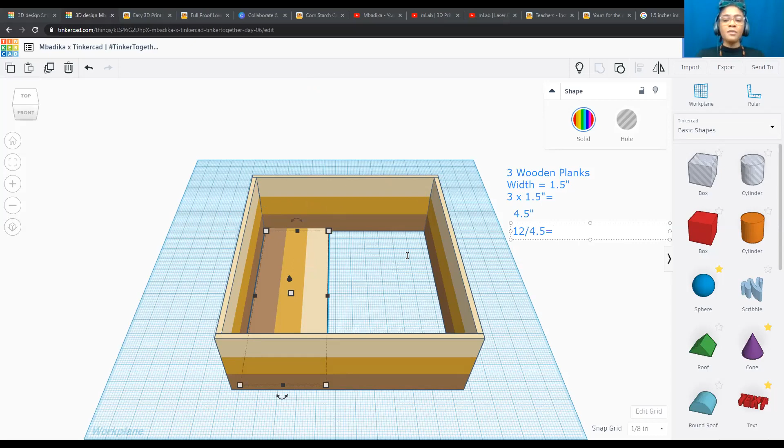So the next math equation I want you to use on your scrap piece of paper to get comfortable with is how many times 4.5 inches goes into 12 inches, or what is 12 divided by 4.5 inches? Go ahead and do that and let me know in the Q&A what's your actual answer.

Okay, I see a couple people are like, hold on, this is complicated math. Don't worry, we're going to stretch all of your muscles in showcasing how you can bring your ideas to life using STEAM. I'm not just going to sit here and do CAD models with you or circuits.

So I'm going to show you on the calculator. 3 times 1.5 inches is 4.5 inches. Next up, 12 inches divided by 4.5 inches is a lot of digits. It's 2.6666666667. That's how many times 4.5 inches goes into 12 inches, which means we're pretty much going to be looking at 2 and maybe 2 more planks in order to cover those 12 inches.

But there's a problem, there's a mini problem. And after we do this part, you're going to really feel like an engineer. Trust me on this one.

So if we go back to our Tinkercad model, let's go ahead, since we know it's 2 of these planks, let's go ahead, duplicate and repeat the same. Oh, you know what? I'm not going to do that. I'm going to click this actual plank.

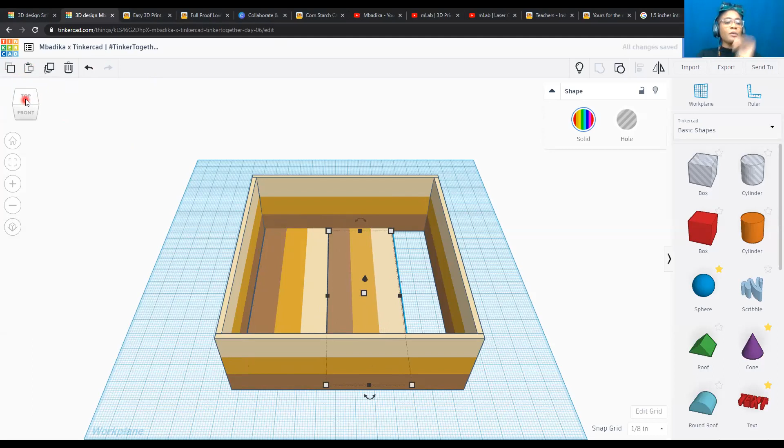So right here we can see if we change on our left-hand side our camera angle, this is 1, this is 2. So we already have 2 planks in our actual bottom of our garden bed.

So now we need to fill up this space right here.

2.6666666667 can be translated into a fraction. So if you've done fractions before, you'll know 12 divided by 4.5 equals 2.66666667, or 2 2/3 is the number of times our plank can fit at the bottom of this, right?

Now, how many planks make up one side? There's 1, 2, 3. So if each of our plank sides is made up of 3 mini planks - see, I'm trying to write notes, it's hard to write notes.

A number of times our plank sides fit the bottom of our garden bed. And we can see that in Tinkercad. We can actually see that this bottom 1, 2, and it looks like there could be space for at least 1 additional plank.

Now we have 3 of these, correct? So what's 2/3 of 3 planks? There's 1, 2, 3. So what's 2/3 of 3 planks? That means all we need to do is remove 1 plank. So 2/3 of 3 planks is 2 of these planks.

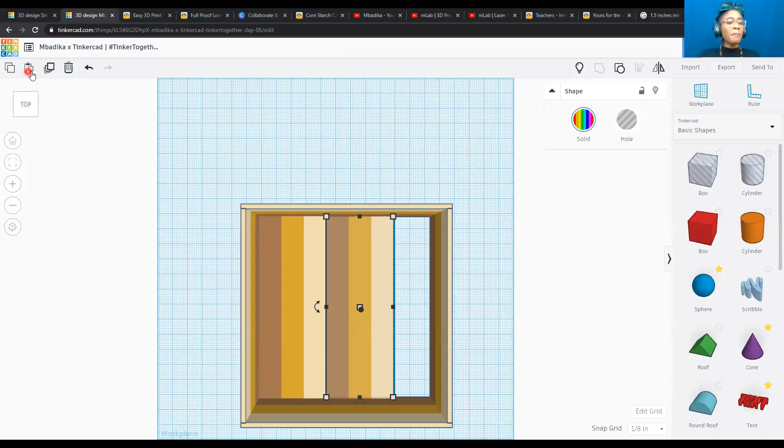So going over to our left-hand side once again, we're going to copy and we're going to paste. And you see here how it's not really filling up because it's overlapping. So what I'm going to do is move this over. And you see kind of we're in that little weird spot there.

But what I can do is go over to my right-hand side and click the ungroup button. When I ungroup, I should have each one of my individual planks. So instead, let me click off, click back over, and change my camera angle on my left-hand side. And you see this one plank kind of hanging out.

I'm going to go ahead and click the delete button to get rid of that plank. So this is...

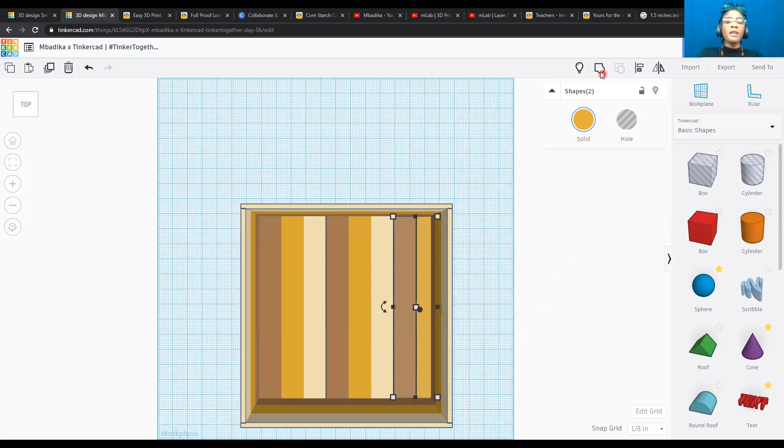Oh sorry, the other thing I wanted to do was to group this plank and my other plank that's sticking out right here. So this plank and this plank, I want to group them back together. So that way, ooh I forget the multicolor, y'all have to remind me of the multicolor.

So now I have 1, 2, and 2 2/3 planks to make up my actual bottom.

So if we go back over here, our math showed that if each 3 plank is 4.5 inches, and each length is 12 inches, we had to figure out how many of those 3 plank sides was gonna cover the length of our garden bed bottom. So what we did was how many times does 4.5 inches go into 12 inches? And we found out it was 2.66667, or 2.66667 equals 2 2/3, which means it goes 2 2/3 times into the garden bottom.

At first, we were a little perplexed.

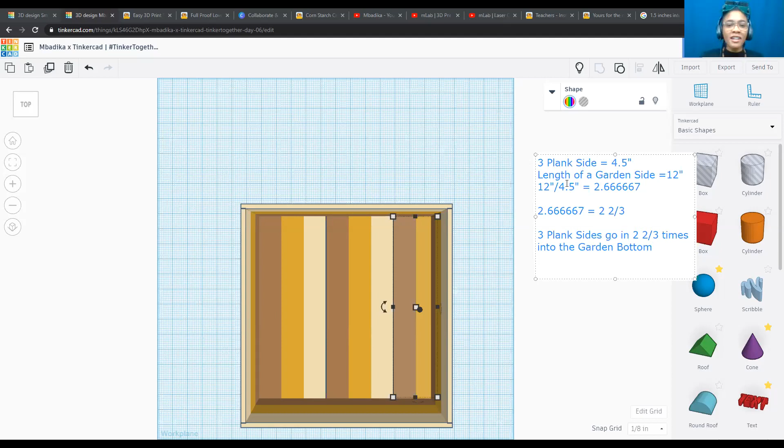How do we get that 2.66667 or that 2 2/3? What we did is we basically, in Tinkercad, went from our 3 wooden planks, took 1 to make it 2/3. And that's how we covered the bottom.

Now there's one other thing we need to cover before we finish with this model today, and I'm going to show you that in Tinkercad. This is the final thing to make you realize why measurements are so important when it comes to CADing.

If we look from our top view, we'll notice it's not that bad what we're looking at. It looks pretty aligned. But then when we actually look at it from the sides, checking our camera angles using that left-hand side, we notice there's a little bit that's kind of overlapping. So from the top view it looks okay, but from the side there's a little bit of an overlap.

Now let's go back to our top view. I'm going to ask you all a question. What do you think is accounting for that little overlap over here? What do you think we didn't take into account in our 3D models that would allow for that little bit of gap to exist out here?

So you see this little bit? If we zoom here, I'm going to change my angle a bit so you can see that the length of that little side panel stops here, but we go past that right here. And if I was to give you a little bit more of a hint, this gap here that we go above looks similar in thickness to the thickness of our actual panel sides.

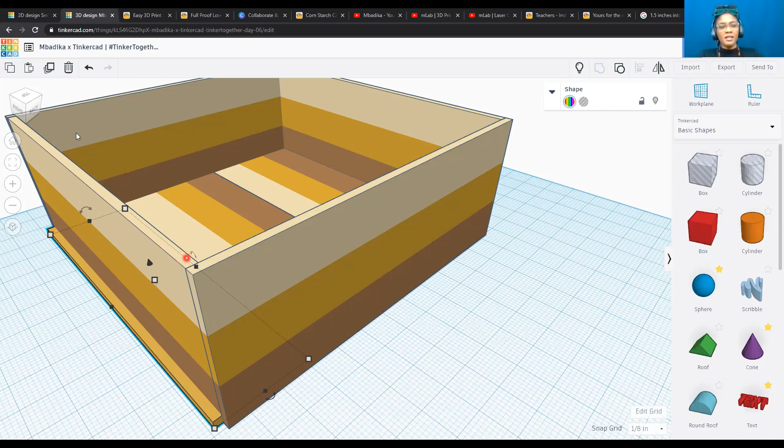So why do we have an overhang here that looks similar to the thickness of our actual garden sides? Let me know in the Q&A part what you're actually thinking we didn't take into account.

For those who are asking earlier how I made the dirt disappear, I'm going to show you how I made the dirt disappear, because we got to bring the dirt back after we finish this part.

So why do we think we have that little overhang there? Don't stretch your brain out too much, I just want to see a couple more responses. Why do we think we have that little gap, that little overhang?

I'm going to show you. Now this is the part that engineers don't really show you as why it's important to understand math. So if we look here, we have that little overhang, right? Let me put a spotlight on it. Don't worry if you're not following, just listen and look at your screen. You see we have this overhang and it looks like the same width as here, correct?

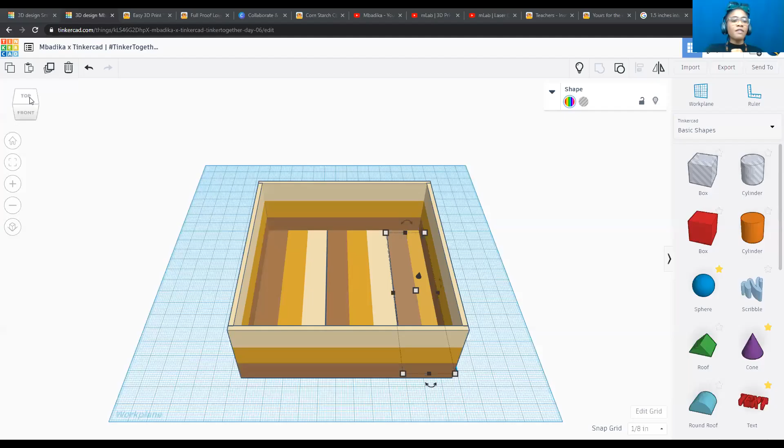One of the things we have to keep in mind when we do 3D designs is that most of the time we occupy ourselves with length and with width, but we always seem to forget that we have to take into account thickness. So when we actually made our Tinkercad model, our actual width of our project isn't actually 12 inches. The reason why it's not 12 inches, let's look at it from the top view. If the thickness of this wooden panel here, as we stated before, is 0.25 inches, then we've already taken 0.25 inches from this plane here.

So I'm going to show you here. The actual length of our side is 12 inches, right? That's the length from here to here. So I want you to write on your piece of paper, write down 12 inches. Then draw another rectangle that's 12 inches by 1.5 inches, and then draw another rectangle that's 12 inches by 0.25 inches, which is going to replicate or showcase this. Once you do that, I want you just to listen, and we're going to do this together.

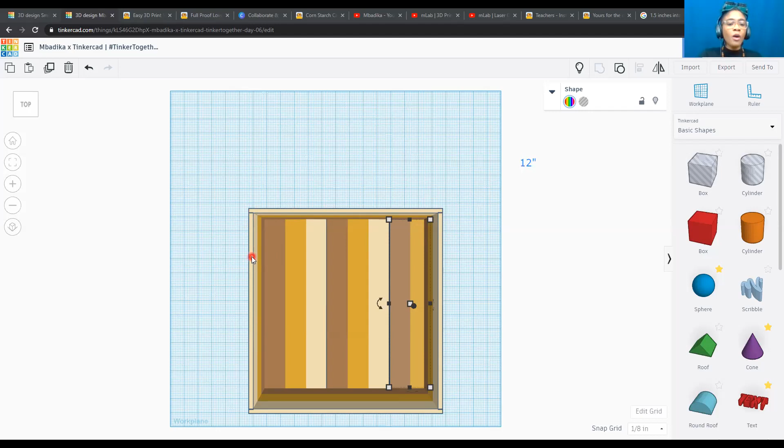The reason why there's that overhang is because the actual distance from here to here may be 12 inches, but if we include this panel and this panel, the thickness of these two panels takes away some of our length here. So instead of from here to here being 12 inches, it's 12 inches minus the width of this panel and the width of this panel. Now we already know the width of that panel, thanks in part to our measurements before, and we can just click on that little white square.

You see me zooming in to show you. We just click on a little white square and we see it's about 0.24 inches, it's supposed to be 0.25 inches. I can actually go ahead and edit that. So it's supposed to be 0.25 inches, so it was actually 12 inches minus 0.25 inches minus 0.25 inches.

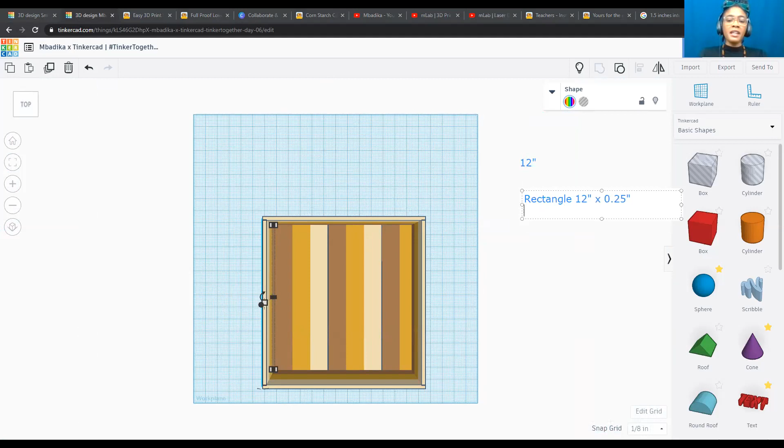Let's go ahead and add that to our math right here. So on a piece of paper with me, on the rectangle that says 12 inches by 0.25 inches, that's the length of your rectangle. Which means if you're adding two panels below it, that's 12 inches minus the width of panel 1 minus the width of panel 2.

Now, we already know the width of panel 1 and the width of panel 2 are supposed to be 0.25 inches. So we can go ahead and do 12 inches minus 0.25 inches minus 0.25 inches, which is similar to 12 inches minus 0.5 inches, which means the actual width is 11.5 inches we need in order to fill in this actual bed. So 11.5 inches is what we need.

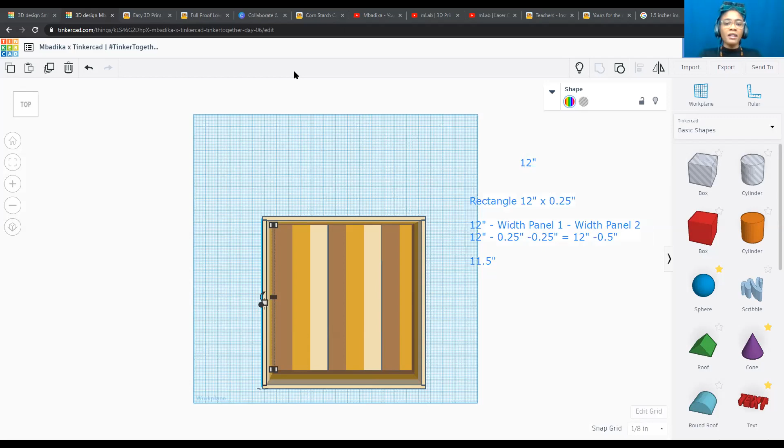So that part that's sticking out on that little side here, if we go ahead and put our spotlight back on, the actual width sticking out that has lost its little home is about 0.5 inches, because that's how much longer this here is. It's 12 inches, but the actual space inside should be about... oh my god, I'm getting tongue-tied. See, math gets you tongue-tied. I think that's what makes people scared of it.

It's actually 11.5 inches. So that means we need to figure out how to get our actual plank to be 11.5 inches. So instead of our actual thing being 12 inches divided by 4.5 inches, we need to do 11.5 inches divided by 4.5 inches, which lets us know how many times those planks can fit in.

I'm going to do the math for you so you don't have to worry, but I want you to write this down because I want you to look over it, because tomorrow we're going to be bringing your own to life, and this is some very important skills you need to know to make sure you don't make this mistake. So I'm going to go ahead on my calculator and do 11.5 divided by 4.5 inches, and I find out it's approximately 2.55 times.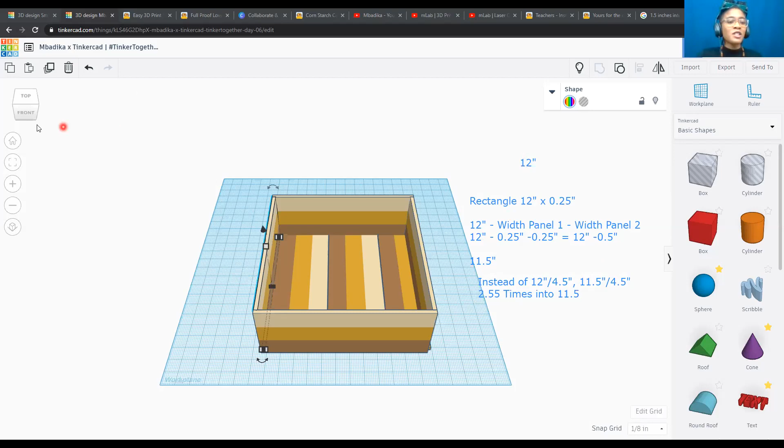So what we can actually do is go to our left-hand camera angle, and instead of worrying about all of this, I'm going to show you a trick. Let's go to our left-hand camera angle and look at the bottom. If we look at our bottom and click off, we can see all of this is off by about 0.25 to 0.5 inches. But what happens if we actually move this bottom of panels over 0.25 inches?

So what I'm going to do is select all of my bottoms. I'm going to zoom in so you can see. Using my left arrow key, I'm going to move it 1/8 of an inch, another 1/8 of an inch, which makes 1/4 of an inch. Do you see how it's fitting right there perfectly? I'm going to show you if you don't believe me.

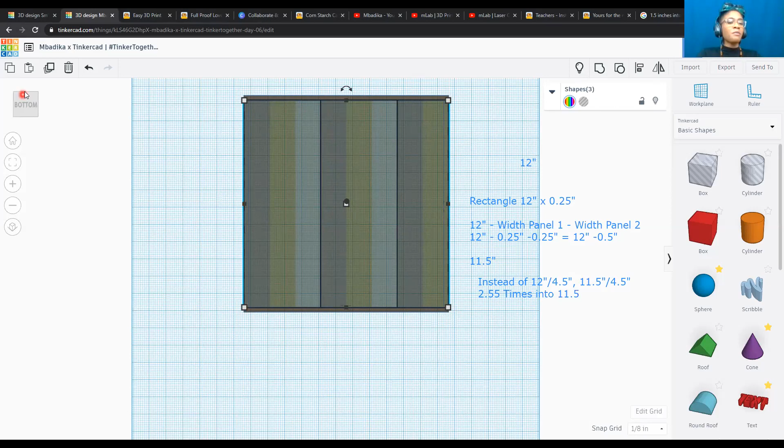I'm going to go ahead to the top. I'm going to do little angles here, we're going to do a whole 360. Do you see how all of a sudden that bottom is fitting perfectly? What I actually did was, instead of trying to fill in from here to here on the inside, I just made sure it aligned from here to here, which is actually 12 inches.

The reason why I took you down this dark path is to show you how quickly, if you don't take into account that third dimension in your models, it can mess you up and you start panicking. But don't panic. You can easily remedy those mistakes by making sure you take slight adjustments and think outside of the box. Now we're no longer in panic mode.

We can actually bring back our soil. So what I'm going to show you right now is how we bring back our soil into this project, and then we'll be done and ready to get started for tomorrow, which is when you'll actually bring your own garden project to life.

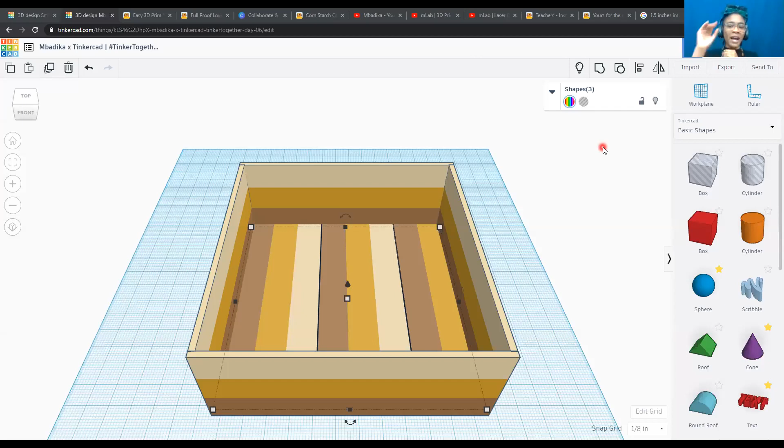So let's go back and bring that soil in. Click share. Remember that light bulb tool I showed you earlier? I'm going to go to my right-hand side, click the light bulb, and ta-da, it's back. If I want it to disappear, I click off and then click that actual soil, go back to the right-hand side, click the light bulb to make it disappear. And when I want to bring it back in, click the light bulb again. So now I actually have my garden bed.

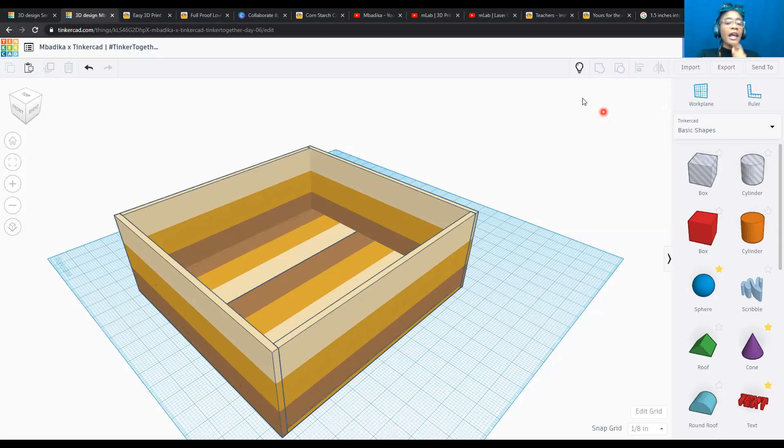To make this look more realistic, I'm going to bring in—oh no, someone's light bulb doesn't work. Okay, don't worry. If your light bulb doesn't work, you may have to refresh your page. Press the light bulb in the shape toolbar to make it disappear, and if you want it to come back, click here to bring it back.

The only other thing I'm going to add to my prototype is on the right-hand side, I'm going to go down to my Smithsonian collection and bring an orchid from there to my work plane so I can have some flowers in my garden bed project.

I'm just going to randomly put some flowers because I'm going to align them a little bit later. But you can see here how I actually have my little garden bed, and I'm just using the Smithsonian collection. Feel free to use any other flowers you see in any of the other components collections.

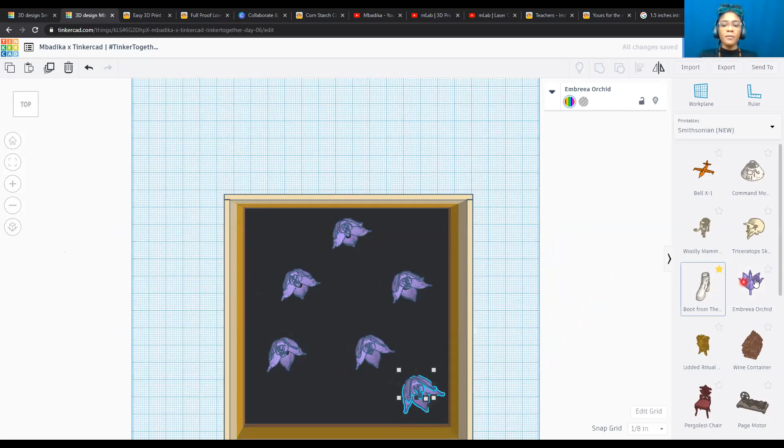No sweat, no sweat. And I know a couple of you are like, Ms. Nisha, you didn't have to take us through that math detour. I wanted to, because tomorrow when you do your own project, I'm not going to be sitting there with you on that side of the screen. I want you to know it's okay. You're going to be having a lot of numbers, but there are very quick and easy fixes if you're not strong in math or not comfortable with multiplication and division.

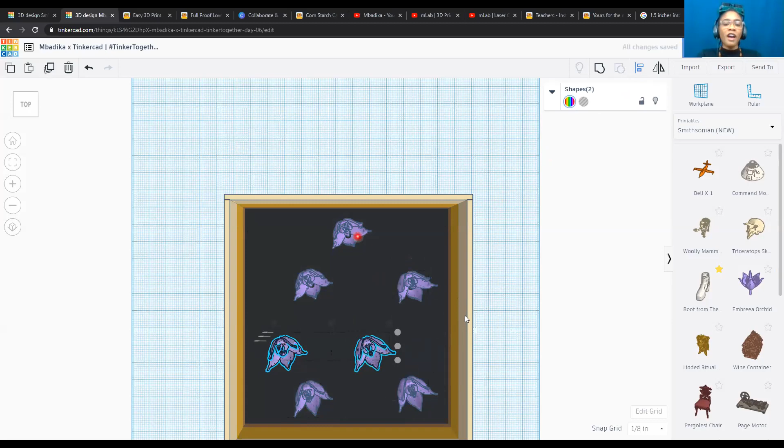That you can do in order to make sure your project can still come to life. So no worries. We've gone to the beautiful side of it, just adding little flowers. I'm quickly aligning a couple of my orchids here to make sure they don't drive me crazy, because I like things to be aligned. That's why the align tool is my favorite.

So you see me going through, being busy, making sure this is aligned to show my little orchid garden. Now, orchids don't typically grow in a garden bed like this, but we're using this as a looks-like, works-like prototype. And we see here that they look pretty okay. I can add some more soil to my garden bed, but I think this is cool for right now. And ta-da! I have my actual garden bed.

So I see a couple of you have asked me a couple of questions, let me go through it. Oh okay, somebody had their light bulb start working again, so that has been resolved. Do you have any questions? I know the math part—math is always the enemy of somebody on a webinar.

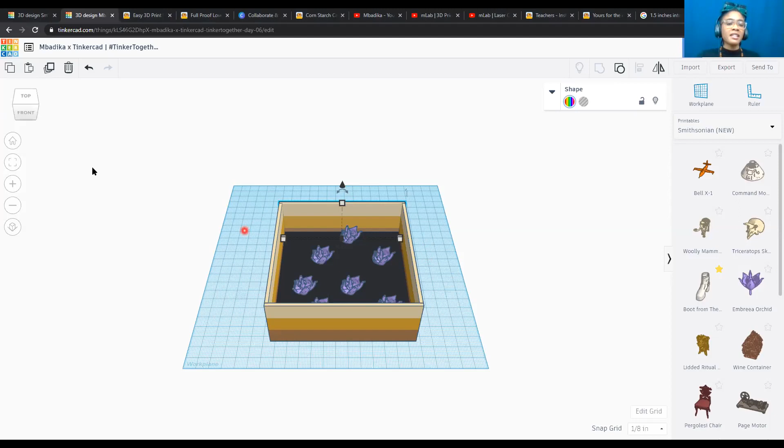Do not fret. Hopefully what I just explained made sense regarding, if you feel it's slightly overlapped when you're doing boxes, all you really need to do is just shift it over so that all the planks actually start off at this corner instead of trying to start off where the first plank is.

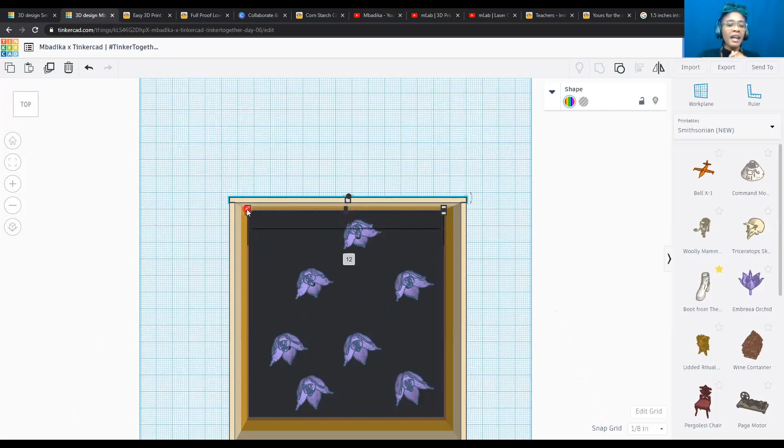So to change my camera view to explain this a little better, the reason I showed you that math detour is that instead of starting here on the inner corner of your box, start here. That way you can make a bottom that covers from here to here, which is 12 inches, without dealing with the complicated math of making an insert of your garden bed that goes from here to here. So that's what all the math was about. Do not fret, do not worry. This is just how I would make a 3D design model of a garden bed.

I'm going to jazz it up a little bit, and I'm going to go to my right-hand toolbar to look for more questions from you all. And I'm going to go to the text and numbers toolbar. And of course, I have to brand everything.

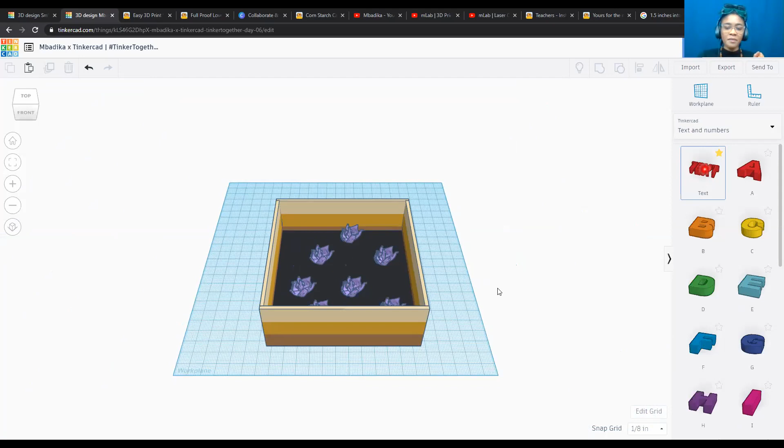So I'm going to bring over the text shape tool. I want to actually brand my garden, and I want to put Mbadika in big, bold letters. I want to add Mbadika to my garden box so everybody knows that this is my garden.

Oh, I want all caps. I wanted to make sure it screams that this is Mbadika. I want to change the color because my favorite color is blue.

And just like I did before, I'm going to use my left camera angle in order to rotate my shape. Let's do 90 degrees. Is that enough? Yes. I'm going to raise that up, and I'm going to slowly move it into my actual work plane.

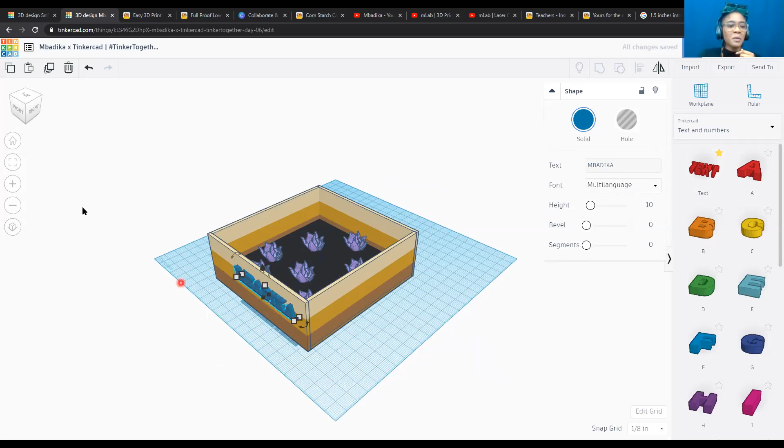So when I look at it from the front, it's Mbadika's garden shed—garden bed, I mean. So now we have my garden bed project.

And of course, in order to make this legit, I'm going to drag from here and select all, so everyone is a part of this group. Click the group icon on the right-hand side. Click solid.

Because I don't want it all being the same color, let's make sure it stays multicolored. And multicolor is selected, so I'm good to go.

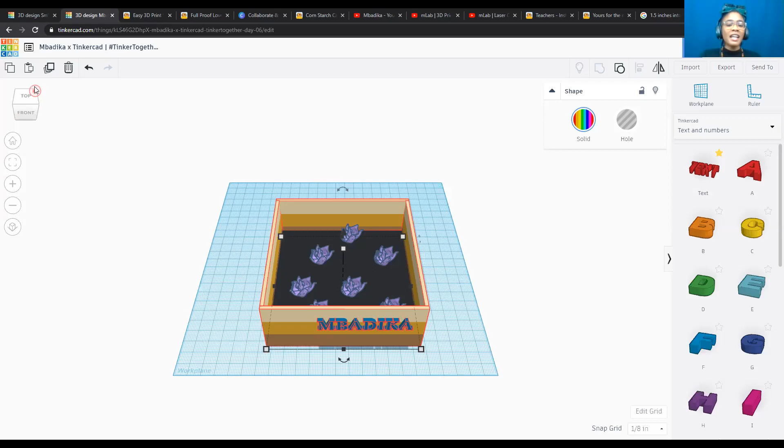And now I can use my left-hand camera angle and play around with what would be a really good snapshot of my garden to post on social media. I think that's a good shot. I'm going to zoom in a little bit.

I'm going to click off of it so it doesn't look like something's wrong. I'm going to go over to my right-hand side and click send to, and I can actually download a screenshot of my actual garden bed to post on the actual Mbadika Twitter account, as well as Instagram.